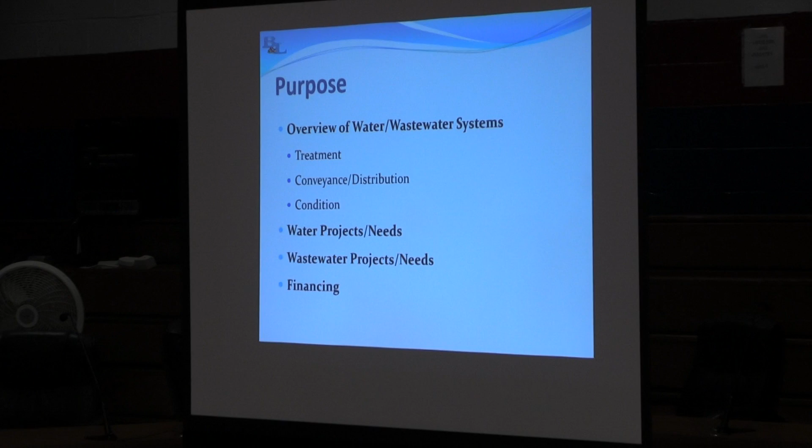So again, as Greg alluded to and John talked about, this is really just an information session on the town-wide state of the water and sewer system, some specific projects we're working on, and some of our thoughts on moving forward. I want to provide an overview of the water and wastewater systems within the town, what some of the needs are, some of those needs being addressed right now with design and construction projects, and then a quick discussion on financing towards the end—how much these projects are costing and how they'll be paid for in the future.

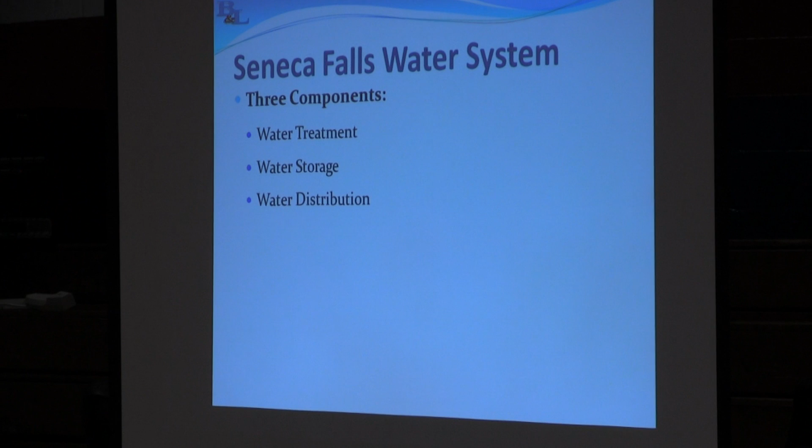So the first thing we're going to focus on is water within Seneca Falls. There are 3 components to the water system. We've got 3 boards over here, so even while I'm talking, if you have a specific question, feel free to go up and take a look. The one on the right is an overview of the water distribution system, the primary components for the water treatment and supply system within the town of Seneca Falls. The 2 drawings on the left provide an overview of one of the projects I'm going to talk about, and also a nice snapshot of the overall sanitary sewer system within the town. So when we talk about water, there are 3 components: treatment, storage, and the distribution system. We'll get to those.

So just a real quick background: water for the town of Seneca Falls is treated at the Seneca Falls treatment plant. Ironically enough, it's in Fayette.

Near Cayuga Lake, about 5 miles. I'm not sure if everybody is familiar with where the treatment plant is. It's about 5 miles south of here, right off Parker Road, on the west shore of Cayuga Lake. There's an intake pipe that the water is drawn from. Within that intake pipe, a couple things happen. There's a chemical injection process to deal with zebra mussels, basically an oxidant to keep the zebra mussels out of the intake.

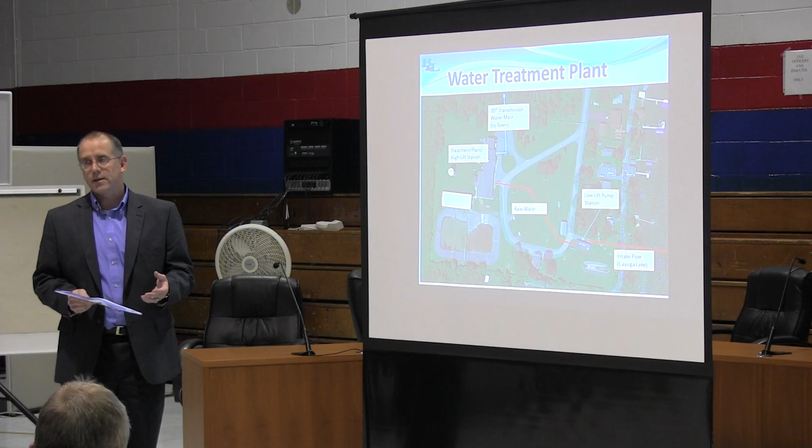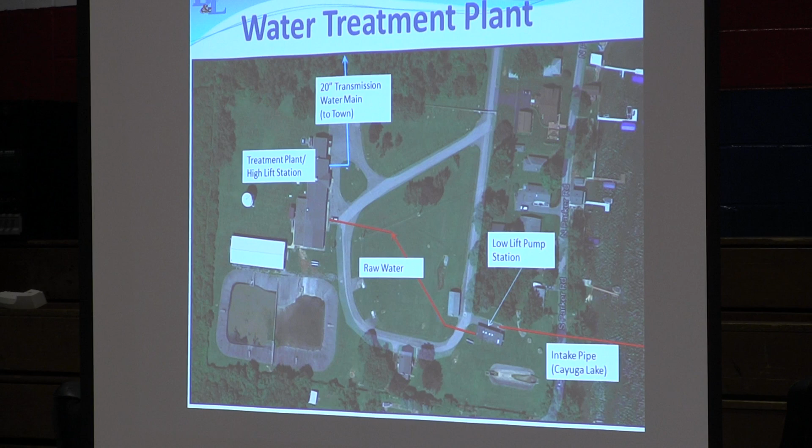Water is pulled into what we'd call a low lift pump station. It's a series of pumps, essentially an intake station. That low lift pump station sucks the water out of the intake and pumps it into the treatment plant. Within the treatment plant, there's a series of processes. Primarily, you're looking to remove solids and disinfect the water prior to distribution. Water's tested, and we'll talk a little bit about that.

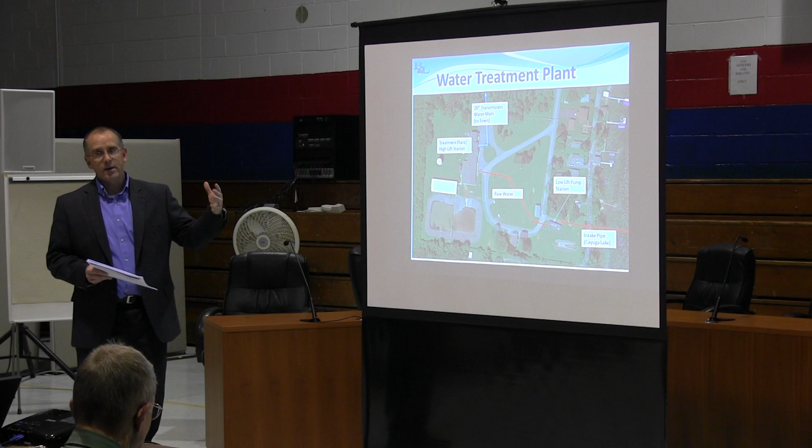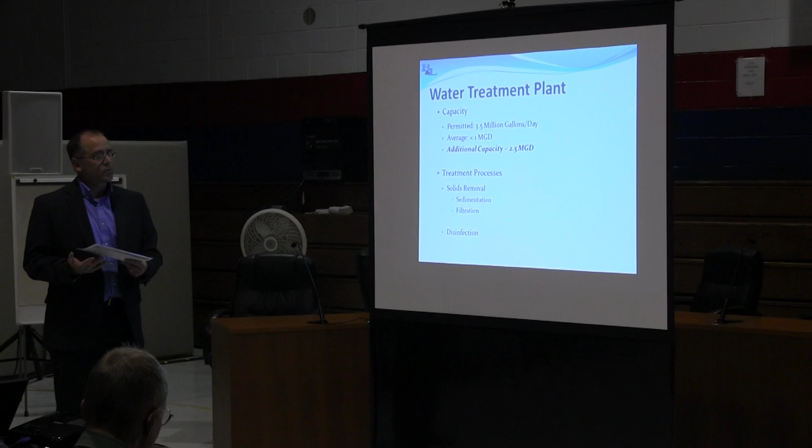From the treatment plant, there's a high lift pump station, a series of pumps that essentially pump that water about 5 miles north into the town into the storage tanks. The current treatment plant within Seneca Falls was originally designed and permitted for about 3.5 million gallons per day. It's only doing about 1 million gallons per day, so there's excess capacity. There's a lot of treatment components, filtration units, pumps that are right now sitting idle because the plant's only putting out about 1 million gallons per day. Simple math is about 2.5 million gallons per day of additional capacity within the treatment plant.

As I mentioned before, if you have any questions specific on what the treatment processes are, fire away. I don't want to get too detailed.

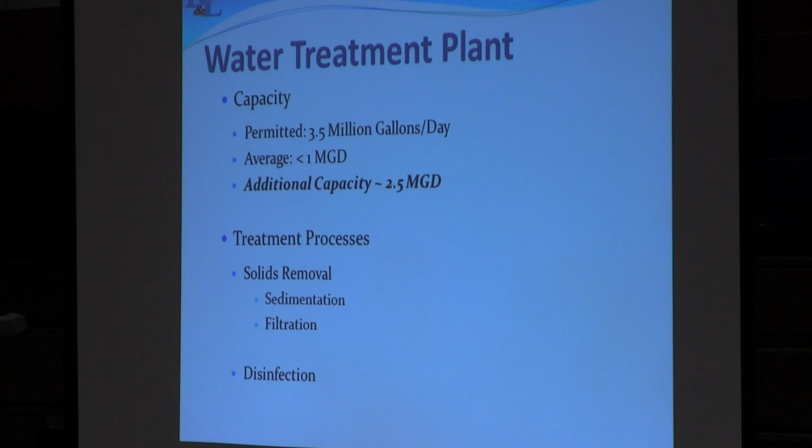I'm going to get the microphone set up. I can talk louder if that helps. It's on, okay. There you go, thank you. So because it's being taped, you're going to have to stay right here. Is it better? Okay. If anybody has any questions on specific treatment processes, engineering type things, I tried to keep this pretty high level. I can talk to you afterwards. Do you have a question back there?

Yes, the disinfection, I want you to explain that, and if it doesn't involve blue algae possible treatment and so on, I want you to touch on where that would be dealt with. The disinfection, what really is that? Okay, well, I have a slide for that. Good question, excellent. Well-timed question.

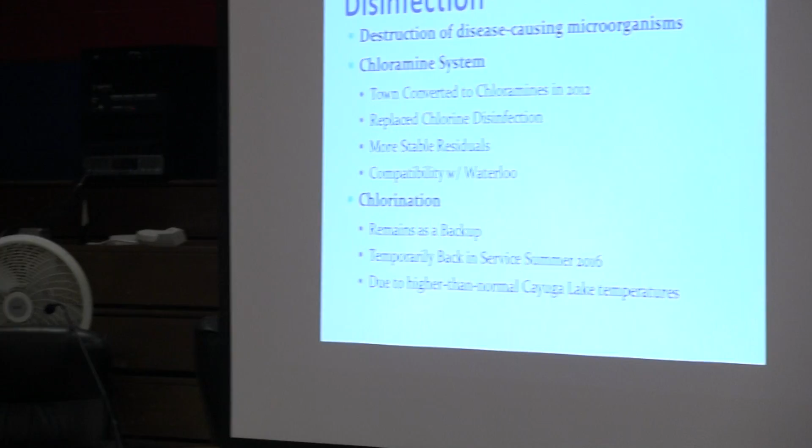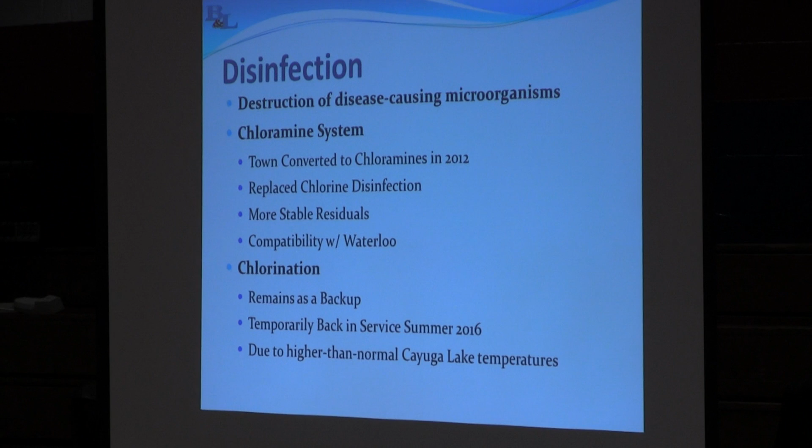Basically, the final part of water treatment is disinfection. You've got pathogens, bacteria that need to be destroyed. There's specific criteria within EPA, Department of Health to destroy those. Typically, it's done with an oxidant, the most common being a chlorination type system. The town of Seneca Falls has used two processes for many years: a chlorination process, which essentially is an injection using chlorine gas. In 2012, they converted to what's called a chloramine system. A chloramine is a type of chlorine product, it's chlorine mixed with ammonia. That's done at the treatment plant.

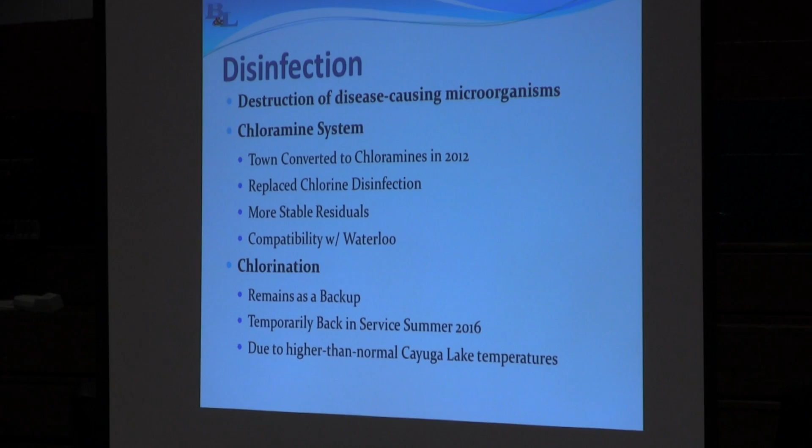The benefit of the chloramine system is it's got a longer life, a little more stable product than chlorine gas dissolved in water. Basically they're oxidants, they react with constituents in water, so they have a certain shelf life. Within the treatment system, you need to demonstrate that you've got a residual, a lower level of that chemical that stays within the treatment process through the distribution system, at the end of pipe at the users. So the current system is the chloramine system. The town has the capability and has actually had to switch back to chlorination temporarily over the summer. Additionally, one more step is a UV disinfection step in advance of the chlorination process. UV is basically ultraviolet light that provides an immediate death or kill of the bacteria. The chlorines provide a residual, so whatever bacteria or pathogens are in the system, the chlorines are there to address them.

After the treatment, every town that has a treatment plant is required to test the water. On an annual basis, the town does a full suite of these tests. Many of the tests are done more frequently, and a lot of these tests are done within the distribution system as well. This is the list of the tests that are performed.

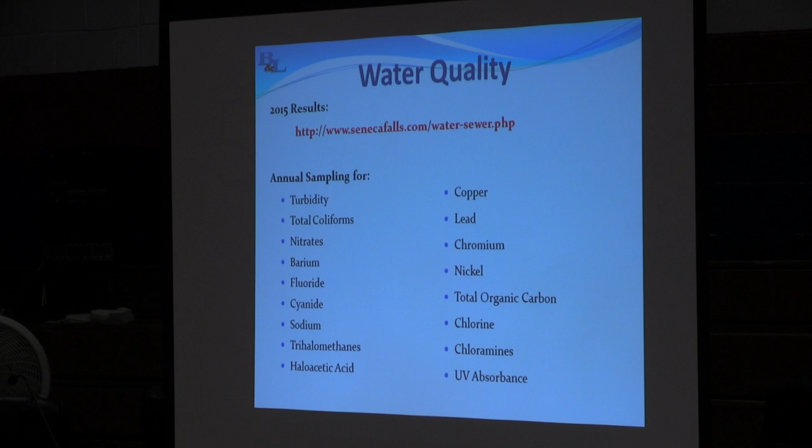Now up top, I have it highlighted. The water quality report is available for the public. It's posted on the town's website, senecafalls.com. If you click on the water sewer tab, it'll take you right to that report. The report provides the analytical data, the results of the water quality testing, and provides a summary of what the water treatment process is and the work that was done.

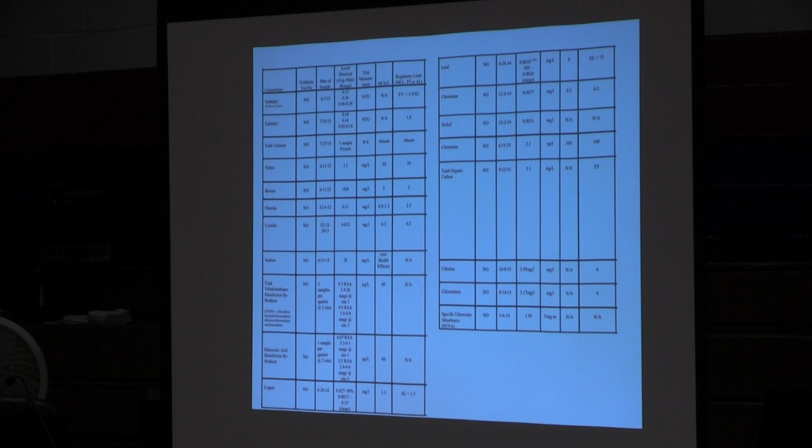The current report is for the year 2015, and towards the end of the year, they'll publish the data for 2016.

Question: Does Cayuga Lake show high levels of salt like Seneca Lake? Not as much, I guess Seneca Lake is the highest. Our intake is Cayuga Lake. From my understanding, Seneca Lake typically has a higher total dissolved solids, TDS as we call it, than Cayuga Lake. But is it high relatively speaking to freshwater bodies? It is a freshwater body. Seneca Lake typically has a higher natural salinity than Cayuga Lake, from the salt mines or salt veins. I believe so, yeah. That's my understanding, it's a natural deposit within Seneca Lake.

So the data that was there, this is basically what you'll see if you go on the report. It's certainly not intended for anyone to look at or scrutinize at this point, but this is the published data that's out there, just to give you an example of what you'll see if you go on the website.

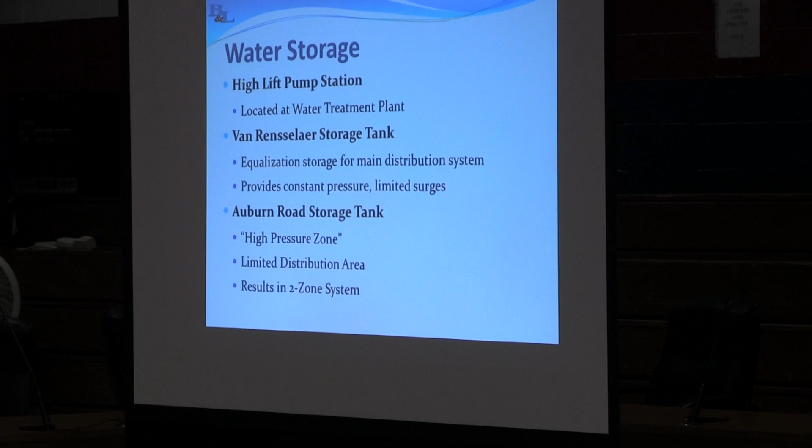So from the treatment system, we've treated and disinfected the water. In order to make the system run smoothly, the town has 2 water storage tanks. The way water works, as you all know, your taps are on in the morning and at night, so there's a demand curve, as we call it as engineers. The demand for water is not a straight same amount over 24 hours. In order to address this, we put equalization tanks in the process.

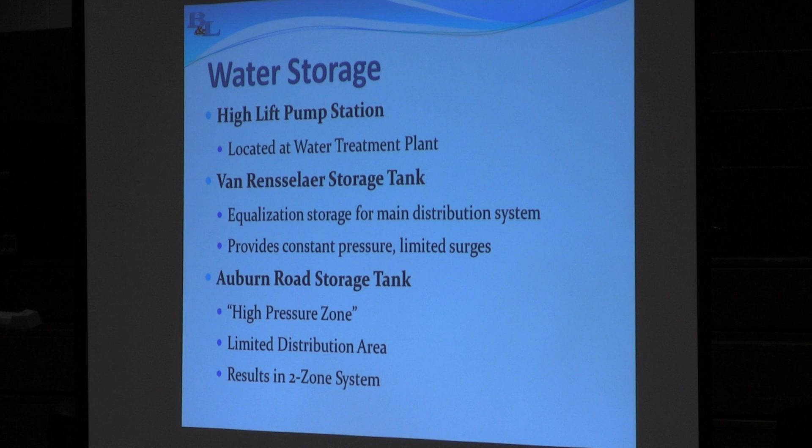So the town has 2 equalization tanks. One is the Van Rensselaer tank, the second is the Auburn Road tank. I'm going to talk about those a little bit more. Really the primary intent there is to provide a constant flow of water, so if you turn the tap on, then water's there. That's one of the projects the town's been undertaking this summer. We'll talk a little bit about those and what we saw with those projects.

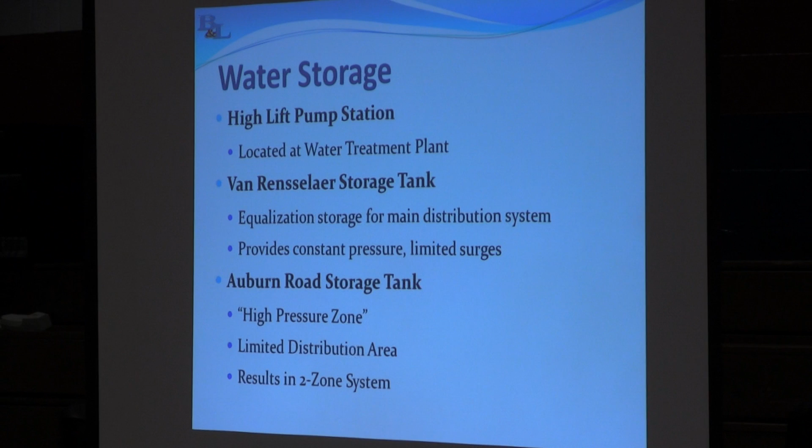That's the Van Rensselaer tank, I'm sure most people know it, on the south side, south of the canal. That tank was installed in 1962. About 20 years ago, the village did an interior-exterior recoating. The tanks are very large, they require maintenance, and it's pretty critical to keep them functioning that they are periodically inspected continuously, and periodically coated on the outside to prevent rust and on the inside to prevent corrosion as well. So currently that tank is undergoing a recoating process.

The contractor the town has contracted with, Utility Services Group, is doing the interior portion of the tank. That's a specialized coating, I believe it's a urethane-based coating. So the interior of the tank is cleaned, sandblasted, residuals removed, and they come in and basically paint the tank. The interior work is currently done, and we expect the exterior will be completed in 2017.

That tank holds about 1,500,000 gallons. It's about 100 feet from the base of the ground surface to the base of the tank, and the tank itself is about 20 feet high. Really what the intent there is, you're pumping water into that. That's essentially the high point in the town, and that's where the water flows downhill, providing the pressure to the distribution system for most of the town.

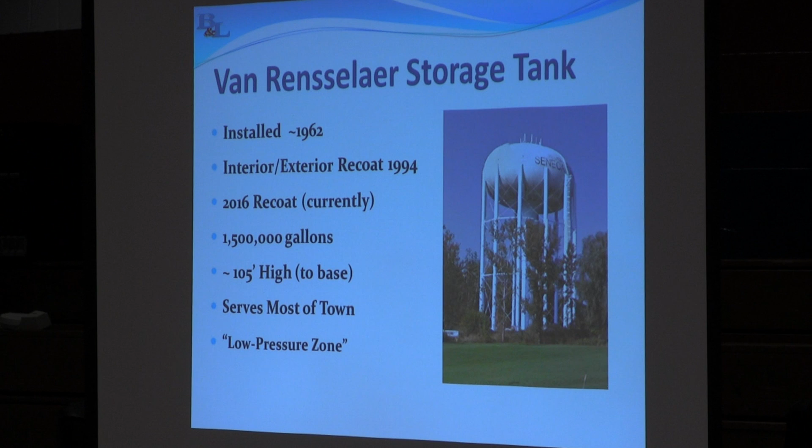The Auburn Road storage tank is located north off of Auburn Road, 5 and 20. That was installed in 1990. From the treatment plant up to the village and then into the northern part of the village, there's a slight increase in elevation, so the northern part of the town really requires a higher pressure zone, as it's been referred to. Prior to that, there was a booster pump station that supplied that, which was kind of a maintenance headache to keep running. So in 1990, the village erected the smaller Auburn Road storage tank. It's a smaller tank, it doesn't serve as large a population base as the Van Rensselaer tank does.

That tank did undergo the recoat. It has been painted on the outside and the interior. That was done late spring, early summer.

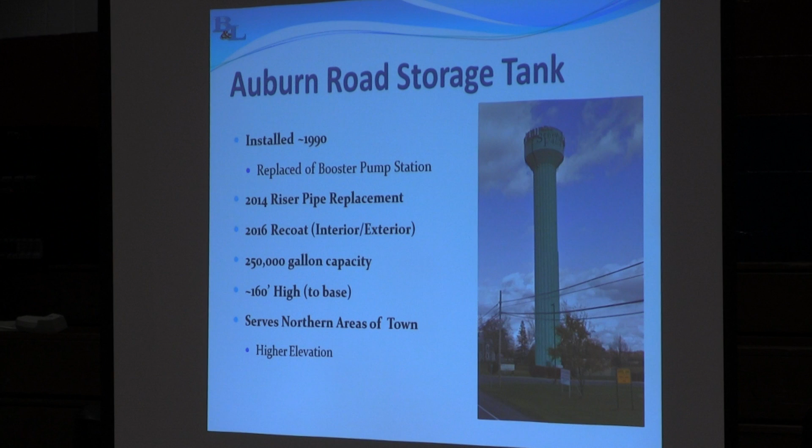Below the tank there's a booster pump station. Basically, the water is discharged to the booster pump station, and all that booster pump does is pump water to the top of the tank, which provides that additional pressure. While that tank was offline, the town was operating that booster pump continuously to keep the water out of the tank and allow it to be recoated.

That process required about a 30 to 45 day process. So the tank was offline for about 45 days, which required a lot of extra babysitting while the tank was operating. That tank is about 160 feet high.

As I mentioned, it's a higher elevation, requires a higher pressure, and that primarily serves the northern area of the town. There's kind of a line of demarcation - I think Oak Street, Cuba Street, and Blackbrook Road kind of bounds the areas of the town. There's actually a series of check valves that keep the two areas separate, because if that fed the whole town, it would essentially have a backwash effect, and those areas of town wouldn't have the pressure. All that pressure would be towards the south.

So in summary, just talking about water treatment and the distribution system - the water treatment plant is operating under capacity, it's in good condition, and it exceeds the requirements for water quality. I think that's the good news message we're here to discuss - from a water treatment standpoint, things are going well. With the storage tank, they were in need of maintenance for 20 years or so.

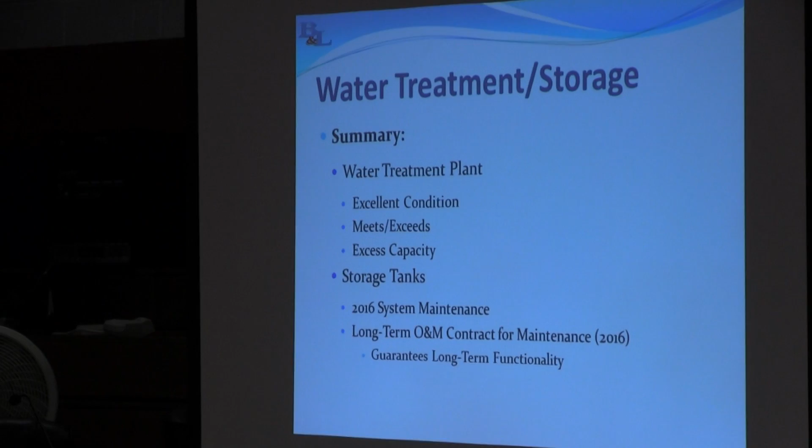The town elected this year to enter into that. Historically, that's been done on a contractual basis, a one-time contract. This year, the town elected to go to contract with Company Utility Services Group. They provide constant annual maintenance, and part of that process is they will go in and paint the tanks, with that cost annualized over time. So instead of paying typically what could be $1 million to $2 million as a line item to paint a tank, that cost has been spread over the 20-year contract period - I believe it's a 20-year contract. So really what that does is take the responsibility to maintain those tanks and puts it on the contractor.

So within the district, once we're in the tanks, you've got a pretty extensive, pretty old distribution system. The current series of water mains throughout the town, the former village - it extends roughly about 80 to 85% of the current town properties served by water. So most of the town has public water available.

We did some rough math, we're estimating about 100 miles of water distribution piping within the town. Remember, this goes from 5 miles south of the village, northwards up to 318 near the Montezuma Winery, Vince's Park essentially. And I think the key thing here is there's a wide range - this is the former village, it's aged infrastructure, so there's water pipes that have probably been in play since the early 1900s.

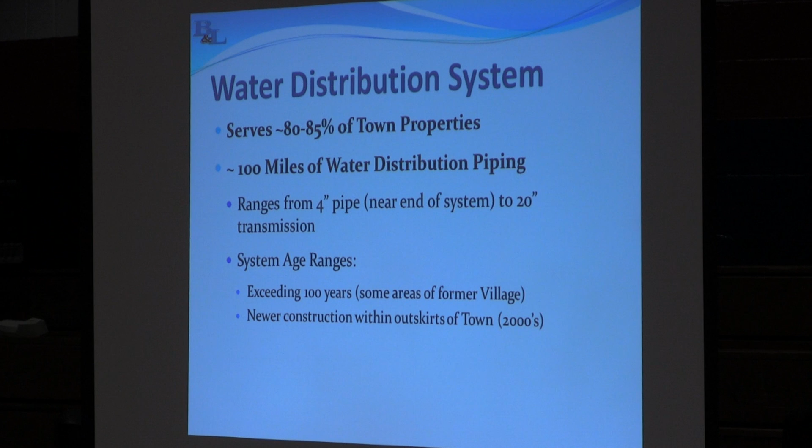So we talked about the age of the distribution system, primarily in the former village. There's pipes in there that have been in the ground for probably greater than 100 years, with lower resilience. They're going to be more prone - they're metal pipes, iron pipes, and they are going to wear down over time. So they're going to be more prone to breaks. They're iron pipes, so they will corrode.

The corrosion process typically is a scale, or we call it tuberculation - not a great word, but that's the term we use in the water industry to talk about corrosion within pipes. Basically, it's a metallic scale that forms on the inside of the pipe. The primary issue with that is it just restricts that cross-sectional area of the pipe, the amount of water that can actually flow through.

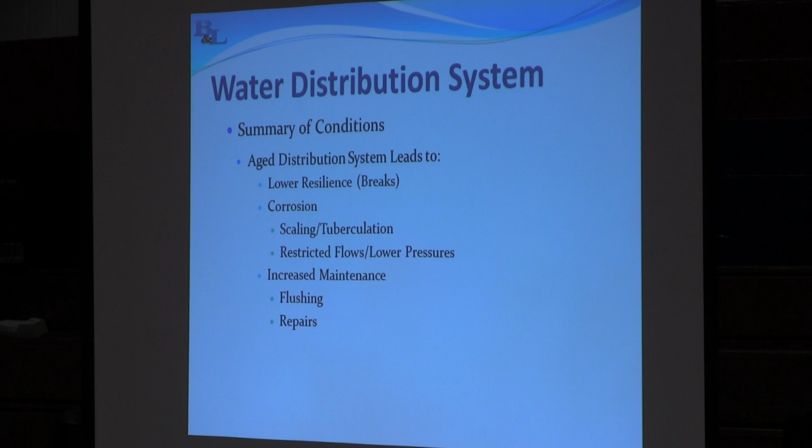So what that leads to in the short term is increased flushing - the smaller pipes will tend to require more maintenance and additional repairs. As we've talked about and noticed through the town, primarily Miller and Rumsey Street, there's been a lot of additional water breaks this year. The second piece that's exasperated it a little bit is with the tanks offline, it's required more manual operation of the system. So those pressure surges that the tanks typically handle haven't been available. There's been a lot of, with these type of systems, pumps turning on and off leading to surges, which, with the aged infrastructure, is going to lead to more breaks.

So you mentioned 2016, the water main breaks. I think late in the summer, the crew was out doing a lot of repairs. I think they had 10 near the period between August and Labor Day, primarily on Rumsey and Miller Street.

What we found in this process is that some of these older areas, specifically Rumsey Street, there was a 4-inch water main that was providing a lot of service. That's a pretty small pipe. Typically, if you're designing a water system, you're looking at a 6 to 8-inch pipe minimum, and typically that pipe's plastic, it flows fairly smoothly. So certainly the 4-inch line was, given the age and size of the pipe, something that was concerning.

So we projected that running down Miller Street, there's likely going to be some additional work as we go down. That's been the initial issue that we've identified. We certainly recognize that there's more areas of low pressure, low flow.

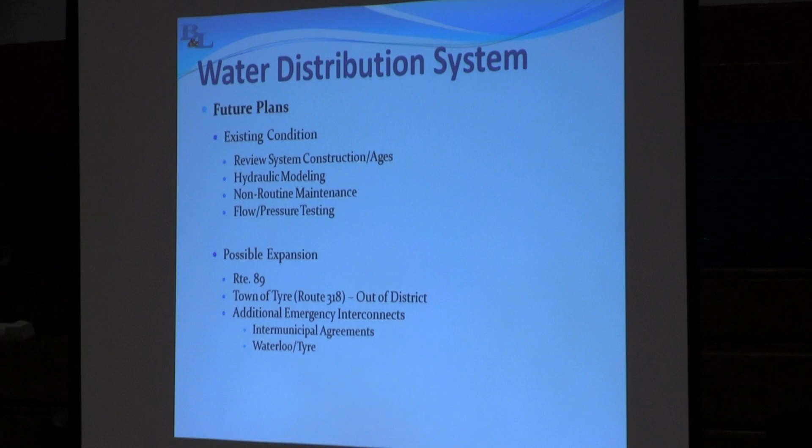So with that, what are the future plans? We've identified the fact that there's aged infrastructure. There's been projects that have been put on the table over the years. Nothing's really ever come to completion, but essentially within the older village, in areas kind of furthest out where you have low flow, those are going to be more problematic. We identify the fact that there's going to be some required maintenance.

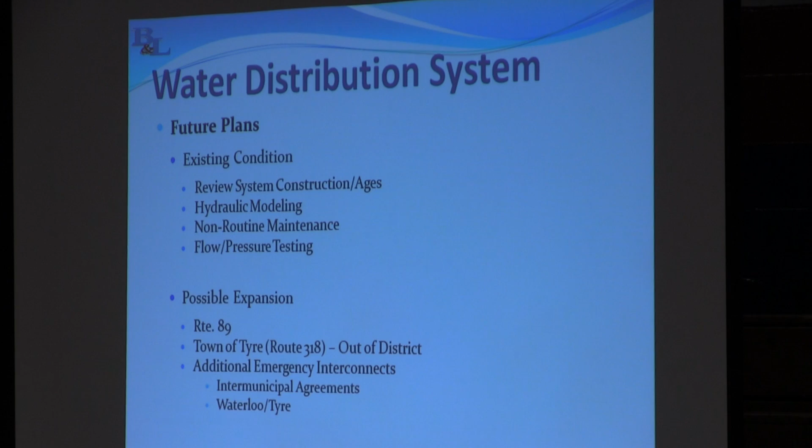As engineers, typically what we would do is develop a hydraulic model of the system. We'd look at what pipes we can predict, what the pipe flow and pipe pressures are going to be. We calibrate that with testing throughout the system to see if the tests we perform are meeting the predicted pressures and flows. Those are the keys we use to identify where the issues potentially are, whether the system is behaving the way it's supposed to, or if it's behaving indicative of some restrictions within the pipe.

So that's coupled with identifying non-routine maintenance, where are the hot spots, meaning where the town has had to focus a lot of energy repairing breaks and valves throughout the network.

I think the other piece that's come up is looking at expansion. As we mentioned before, most of the town is served, but there are areas within the town that aren't served. So one of the early ones we're looking at is along Route 89. There's been some users out there that have expressed interest in obtaining water service. That's some of the good news, coupled with the fact that we have a treatment plant with the capacity to provide the water out there. So we're looking at possible expansion out there.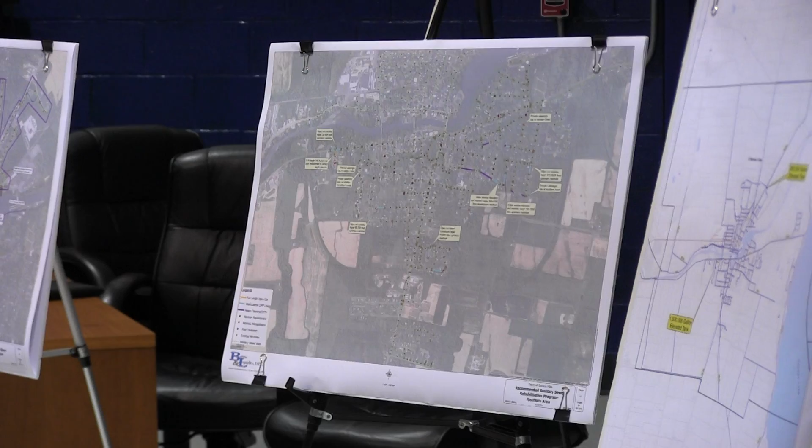And then beyond that, within the town of Tyre, the Montezuma Winery is a facility that's expressed interest in water. That's a project that's going to be pursued next year between Tyre and Seneca Falls.

And then the other thing we've looked at, discussed in greater length, is additional emergency interconnects. There's currently, I believe, 2 along Route 5 and 20 between the town, the Village, and the Waterloo system. I believe the interconnect was operated in 2014. There's some additional ones as we go north to provide, in the event of an emergency, if the tank is down for some reason, or if there's a water main break, those emergency connections just provide a more robust system, the ability to provide constant service. So those are some of the things that we're exploring.

So that's it for water.

Question? Yeah, if you could refresh our memory, the 2 towers, ballpark figure, what was the cost? To install, or the original cost of the tower? No, what was done year to date on the Auburn Road, what's still to be completed over at Van Rensselaer? There was some sort of dollar figure, capital appropriation.

The total cost of that project is probably, both projects, somewhere in the neighborhood of about $3 million. Now, with the Utility Services Group, the contract that the town is currently under, they spread that cost out over several years. No, I understand. Okay, so it's $3 million.

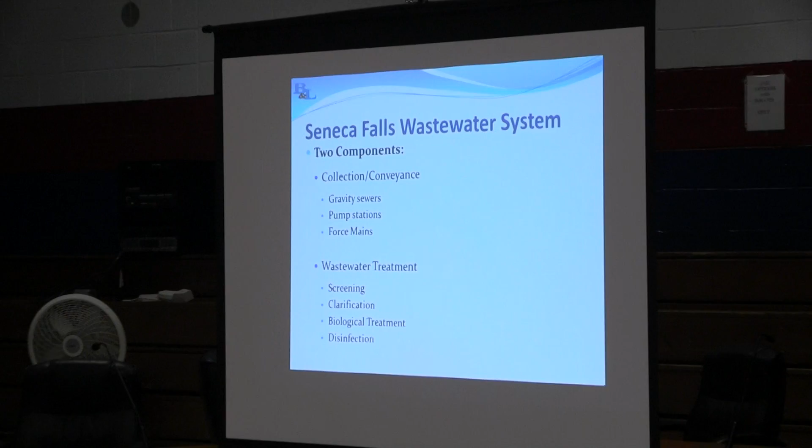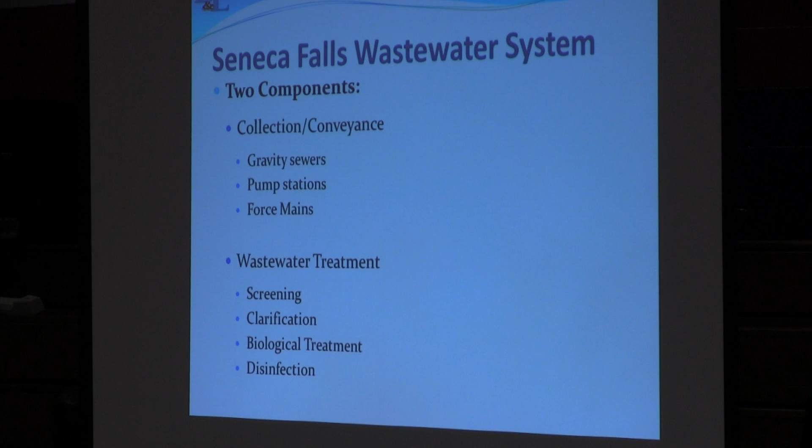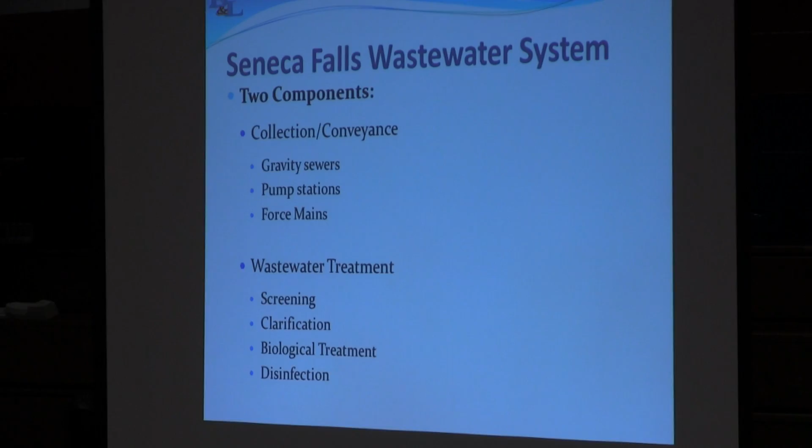Now we're going to talk about wastewater, which is not as nice, but it's necessary. Like water, wastewater has two components, but it's the opposite. With water, you treat it and then distribute it. With wastewater, you generate it, flush it down the toilet into the collection system, and ultimately into the treatment plant. So the collection and conveyance system consists of gravity sewers, pump stations, and force mains.

I'll get into the details, but with wastewater, the coverage within the town isn't as extensive as it is with water. People generally tend to want water before they care about sewers. In rural areas, leach fields are fairly common, though they don't work great in Seneca County in many areas. For the lion's share of the former village and most of the town, sanitary sewer is available. The cost to provide sanitary sewer versus water is pretty prohibitive, substantially more expensive than providing fresh water or a water main.

The wastewater is treated at the town treatment plant, located just on the downstream side, south side, I'm not sure which lock number. It's basically a conventional wastewater treatment system: initial screening, clarification which is essentially settling the solids, and biological treatment, which is performed in 99% of municipal treatment plants. Essentially this is aeration, mixing the wastewater with oxygen. There's bacteria in the wastewater that consumes the organics within it. Following that, there's a settling process called secondary clarification, and a disinfection step as well.

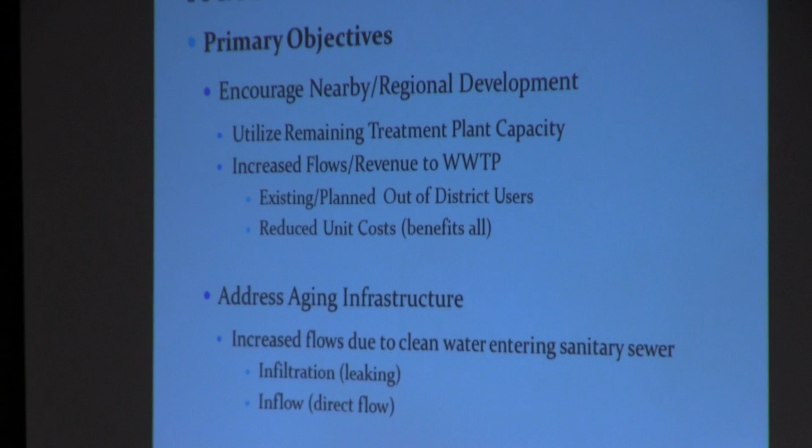So we're actively working on several wastewater projects right now. We looked at what we're working on and tried to lump them into what we're trying to meet, what our objectives are. There are two objectives, and I'll explain why some of these work for Seneca Falls. The initial one is really just to enhance or maintain development. Commercial facilities are more apt to want to develop if they know they have sanitary sewer, since a larger facility can't rely on a leach field in many areas. So to get larger commercial retail within the area, having infrastructure that includes sanitary sewer is pretty vital.

As I mentioned before with the water treatment plant, it's currently sized at about 3.5 million gallons a day and doing slightly less than 1 million gallons a day. Ironically, those are about the same numbers for the wastewater treatment plant: it's permitted for 3.5 million gallons a day, and does about 1.6 million gallons a day on average. We'll get to the reason for that, because additional water goes into the wastewater treatment plant beyond just the water out of your tap.

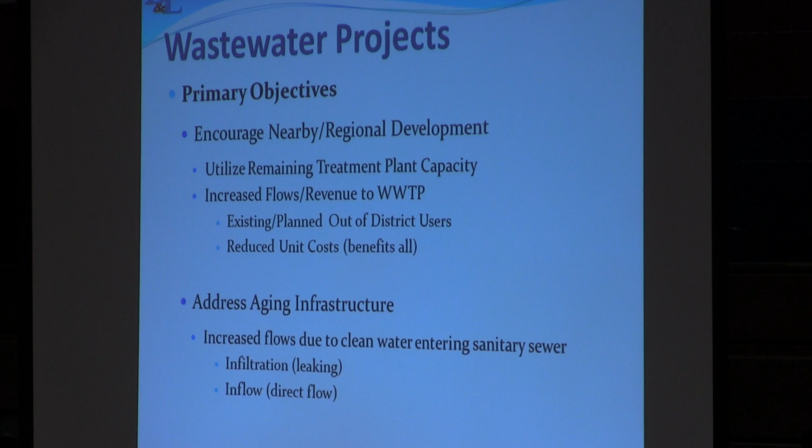With enhancement of development, you've got an aging infrastructure. The sewers within the former village, similar to the water system, probably went in slightly after water, but there's a lot of older sewer pipes using brick and mortar construction that isn't practiced anymore. So there are issues with the sewer system leaking. When it leaks, we think of it as infiltration and inflow—storm water and groundwater getting into the system, which is additional water that needs to be treated at the treatment plant. So to back up, the wastewater treatment plant is permitted for about 3.5 million gallons a day.

Currently averages about 1.6 million gallons a day going into it. There's about 1.9 on average million gallons per day remaining capacity. So the treatment plant is definitely operating below efficiency, similar to the water treatment plant.

What we see though, in some studies we did a few years ago that have actually been going on for several years, is that due to infiltration issues with stormwater and groundwater during rain events, we'll see some peak flows going into the plant that exceed 6 to 10 million gallons per day on an hourly basis.

So shortly after a significant rain event, that plant will see a really high inflow. For wastewater, it shouldn't happen. Wastewater is, remember, coming out of your house - your taps, showers, washing machines. That's really where wastewater comes from.

What we found in Seneca Falls, as a result of the aged infrastructure and the way things used to be built, is there are a lot of unknowns with how things were built. There's a lot of interconnections between sanitary and storm sewers within the system. The aged piping and old manholes lead to leaking as well.

Within the treatment plant there's what we call an equalization tank, an EQ tank. We believe it's about 3 million gallons. That tank's been there for a while and it's not in great shape. So when we get these surges, a lot of times that initial slug of water, that tank will store it, and they'll use it to help bleed the water back into the system. It hasn't been used extensively in the last few years, but during a high rain event, it will be used.

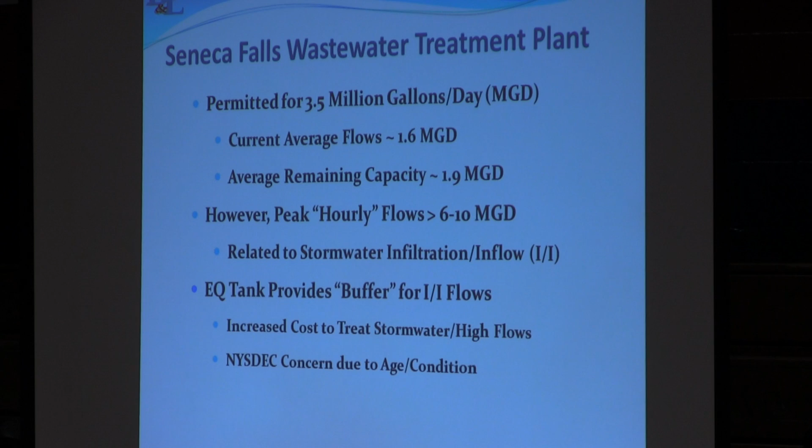The DEC, who basically regulates and oversees the treatment plant, has expressed concerns with the condition of that tank. Some of the work we're doing is really in response to that, just to address what needs to be done with that tank down the road.

That's an overview of the treatment plant. I'm going to drop the mic quick.

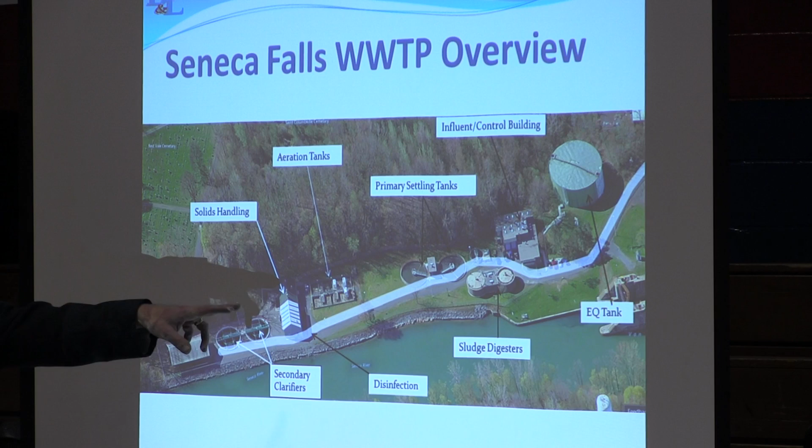From the EQ tank, water goes to the influent control building, which is the initial screening - rags and whatever comes through the sewer system, those solids are removed there. Then it's primary settling, the initial shot for dropping out a lot of the grit and solids. Then the aeration tanks, where wastewater is mixed with oxygen to biologically degrade the organics. Then they go through secondary clarification or settling, and then disinfection. So those are the processes.

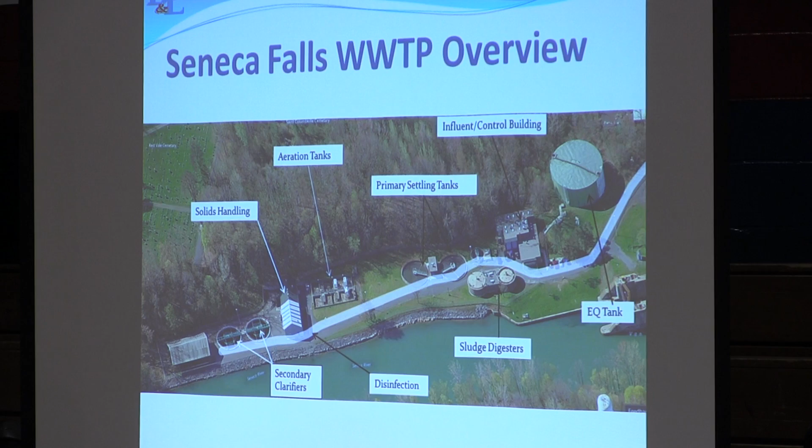This is located, I think, on the south side of the canal, right past the original Elizabeth Cady Stanton School, down on the canal.

So the projects we've been working on tie into the same goals we talked about before, as the development-related projects. There's some we're working on that are solely related to ongoing development and possibly bringing in more wastewater flow into the treatment plant. And then there's infrastructure-related projects as well, identified specifically to address some of the aging infrastructure.

I'll talk quickly about the development-related projects. The first one, which we talked about when I was here in March and actually have shovels in the ground on now, is the Route 414 sanitary sewer upgrade. Following that, there's the Kingdom Road pump station. Those are the two we've identified as more related to future development needs, additional conveyance, bringing it to the treatment plant.

The infrastructure-related projects - I've also identified Kingdom Road there. That project is twofold. Part of it is to provide increased capacity for additional flows coming from areas north, Tyre, Junius, with some projects happening there. The second part is that the current Kingdom Road pump station is undersized, as well as the force main that discharges to it. It's an old force main, probably some 1960s-era infrastructure.

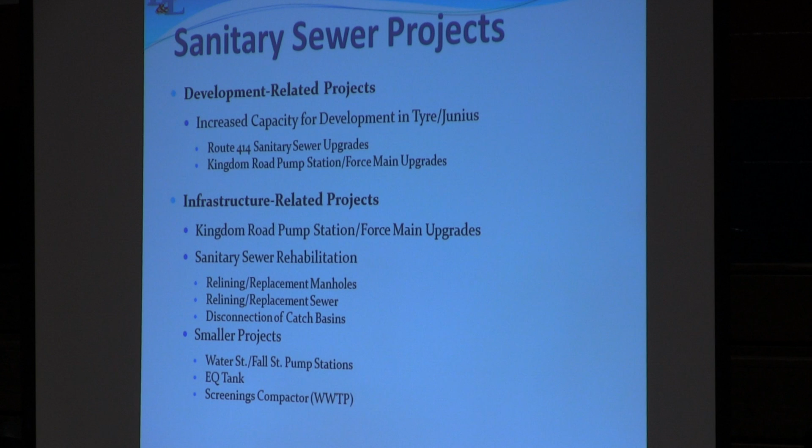The key thing with the infrastructure we've talked about is the rehabilitation of sanitary sewer infiltration and inflow issues throughout the existing collection system. That primarily includes about 3 major components. There's about 170 manholes - in 2013 we did inspection of every manhole within the town and identified about 170 that are in poor repair of some type. Some require replacement, some just require replacement of the frame. So the extent of repair for individual manholes varies. For the lion's share of them, they're constructed of brick and mortar, and the mortar is degraded - they leak. If you open up a manhole, you won't just see wastewater at the bottom, you'll see water leaking into the manhole. That's clean groundwater flowing in that ends up going to the treatment plant and being treated unnecessarily.

So with the manholes, the primary mode of repair is going to be relining them, typically using a cured-in-place lining system. It's a project we're in the design phase on right now, and there's some additional investigation steps we'll be going through.

The big part of the sanitary sewer rehab is there's a lot of catch basins, storm sewer catch basins, and curbside gutters that we've identified as either connected directly into the sanitary sewer, or given the age of the pipe, there's a leak. We've camera'd many sewers and seen storm sewer leaking into the pipes. So part of this project is identifying where the catch basins are and looking at rerouting them - disconnecting them, whether direct or indirect connections from the sanitary sewer, and routing that storm sewer into the storm sewer collection system.

A little question here - the Kingdom Road Pump Station, Force Main - so is that sanitary, and it's pumping because it's at a lower elevation?

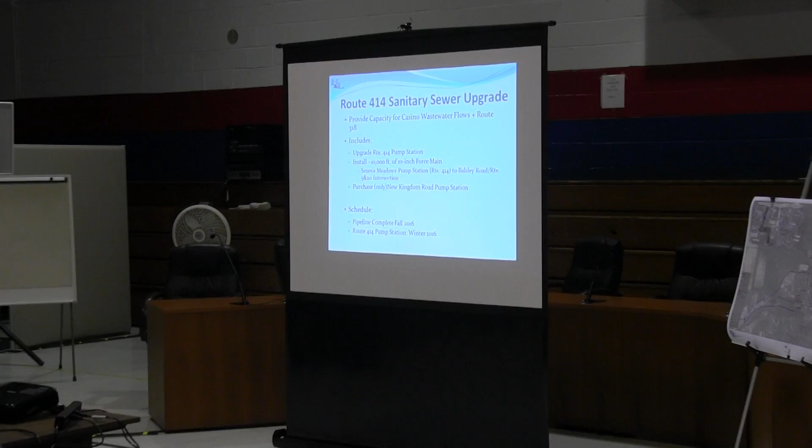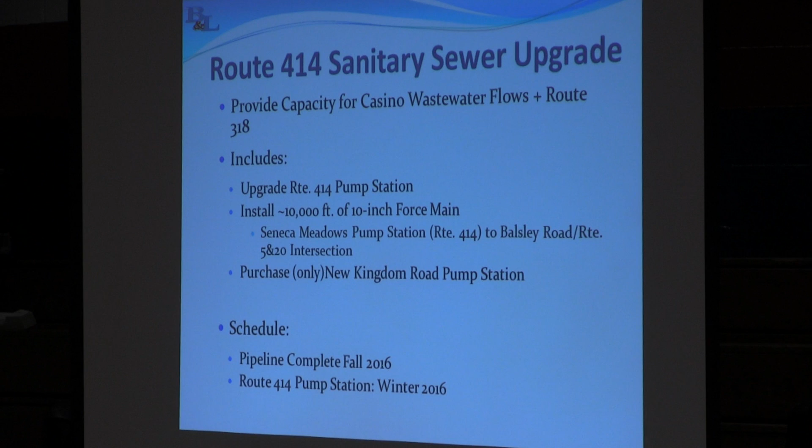Along 414 there's existing infrastructure from Petro down to the new Seneca Meadows area - it's the Route 414 pump station, near the new Blackbrook channel, a couple miles down 414. That project will replace that pump station, upgrading it with a larger one. There's also additional force main going down, starting about the Seneca Meadows facility, that will bypass the existing pump station and run down 414. Del Lago is funding that work. The 414 pump station is being replaced and upsized, and on the next slide - Kingdom Road - that project is actually funding the purchase of a new pump station there as well.

Right now we're on track to finish the pipeline this fall. The new 414 pump station will be installed this winter. Where is it going to go from there to get to us? Good question.

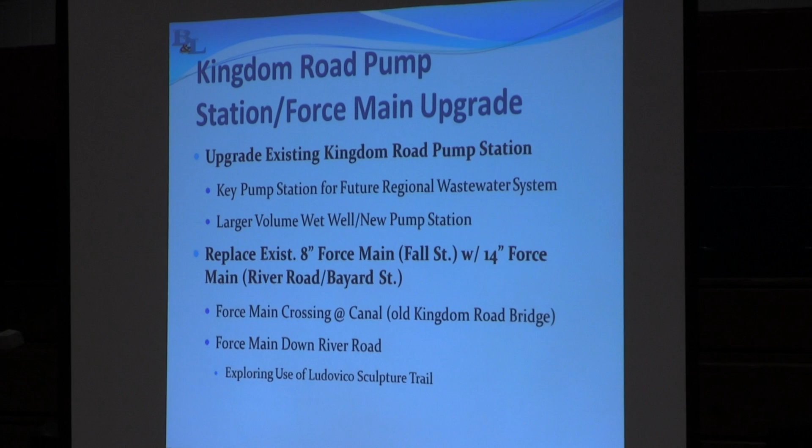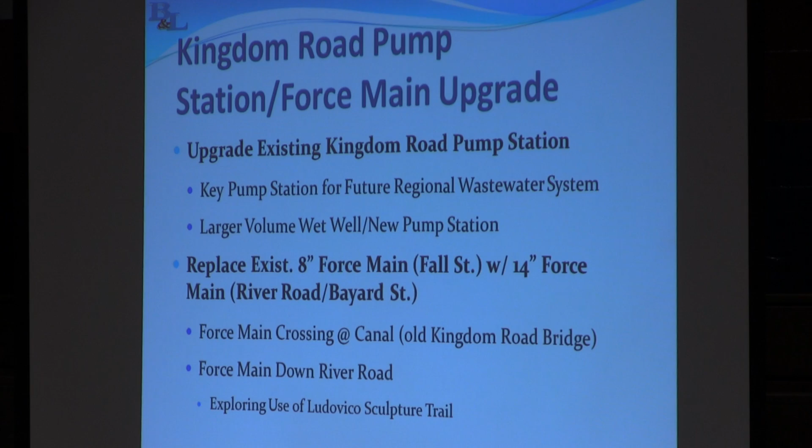I think last time I had a map showing it, I don't have it here, but to trace the source: from Del Lago, they've installed a force main below the thruway. I think they tie into the existing Petro lift station. It flows via a gravity sewer that goes down 414 to a pump station - what we call the 414 pump station, it used to be called the Petro pump station - and that's being upsized.

There's an 8-inch line that's going to remain in place, so that water will go to the 8-inch line. From that point, once you get to Seneca Meadows, we're putting in a new 10-inch line. That line will chase 414 down about Balsley Road, going across the railroad tracks, across 414, then running down the north side of Balsley Road. There's an existing sanitary sewer gravity manhole there, and it'll discharge into that. That goes across 5 and 20, which essentially feeds the Kingdom Road pump station. So then what happens, it goes down Fall Street, 5 and 20?

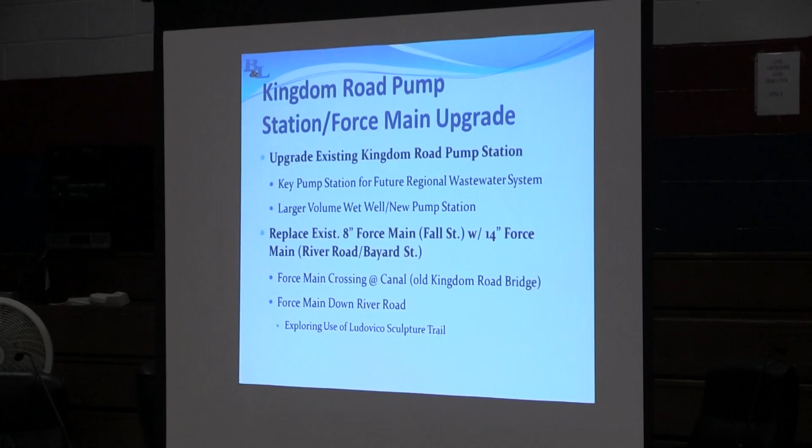We're not... Oh, okay, that's what these questions are well timed for. Okay, sorry, no I know. So really the question is, we talked real quick about the Kingdom Road force main. Actually, can you jump in? I'll just talk with pictures, do a much better job. I'm gonna drop the mic again. That's okay, you talk, I'll be your man.

Okay, where does it cross the canal? We're not following you. So what happens right now is the Kingdom Road pump station is located on the north side of the canal, right over here. It discharges into an existing 8-inch force main, installed circa late 1960s. That force main discharges down Fall Street. There's a large gravity manhole on Fall Street, I think at the corner of Fall Street and Rumsey, and then that flows down Fall Street. The crossing of the canal currently is underneath the Open Street Bridge, right there. That's how the wastewater makes its way across. That's the only crossing in the system right now.

That's essentially the connection between the north side of the wastewater system and the south side where the wastewater treatment plant is. Under the current project, the Kingdom Road station is going to be upgraded at its footprint, but we're going to install a second crossing across the canal using horizontal directional drilling. It's a very common process where a pipe is drilled essentially horizontally below the bed of the canal. That will come across and essentially be the start of the force main.

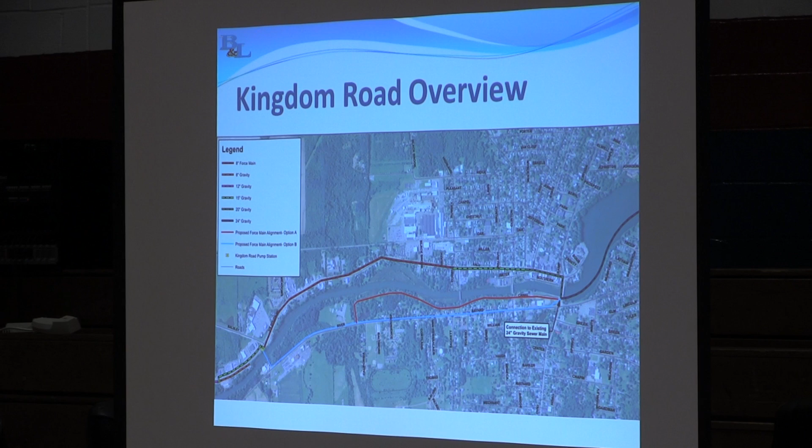So the new force main is going to run down River Road. Currently we've got two concepts in play right now. One is continuing that run down Bayard Street, but there's a lot of infrastructure there - storm, water, existing sanitary. The town currently is pursuing the option of turning that force main and going down the Ludovico Sculpture Trail instead. We've had several discussions with the owners of the property. The concept right now is kind of a shared project where the town would put in the force main using a lot of non-intrusive methods, horizontal directional drilling. In return, the town would provide a lot of the maintenance for that trail, and literally rebuild it into a much nicer upgraded trail.

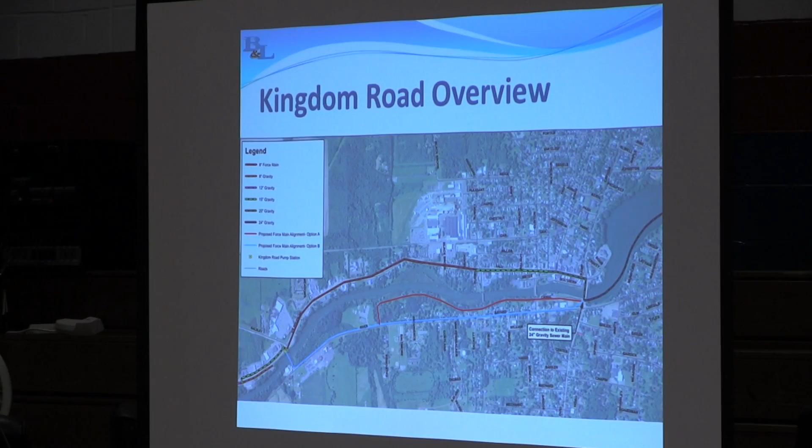Thank you, it'll end up being a better trail than what it is now. It would be, but if you were to go down there you'd have to do a full review. We go through a full SEQR review for that particular project. There's wetlands there, there's many issues. Yeah, that's what I'm thinking. That's why I think they're very opposed to ripping any of that up.

Well, the concept we've proposed would use horizontal directional drilling. What'll happen is you have a machine that drills a pipe below ground. They can extend it and track it on the surface so they understand where the pipe is at any given point. Typically 400 to 600 feet is pretty typical for that type of drilling. Periodically the pipe needs to come up and they need to dig a pit, but the impact to that trail is pretty minimal compared to going down Bayard Street, which would really rip up a pretty busy corridor. Next to Fall Street, that's the next busiest portion of town, so that's what it would take to provide that new infrastructure.

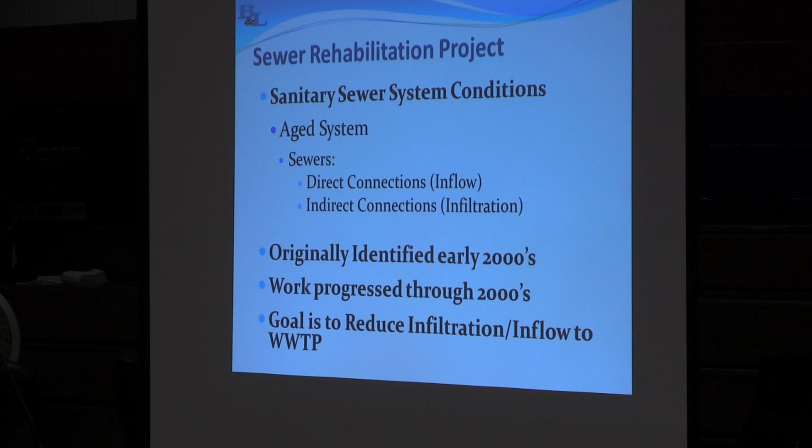Let's move on. So the next one is the sewer rehab. We'll talk a little more in detail about that. This is really the primary rehab, addressing the aged infrastructure - the leaking manholes, the pipes, the older pipes. So really the intent here is to seal up those areas of inflow and infiltration.

When we talk about inflow, that's stormwater that flows directly into the sanitary sewer. Infiltration is generally going to be groundwater. In some cases it could be stormwater that flows into a catch basin that's not flowing efficiently, so there may be some backups with that.

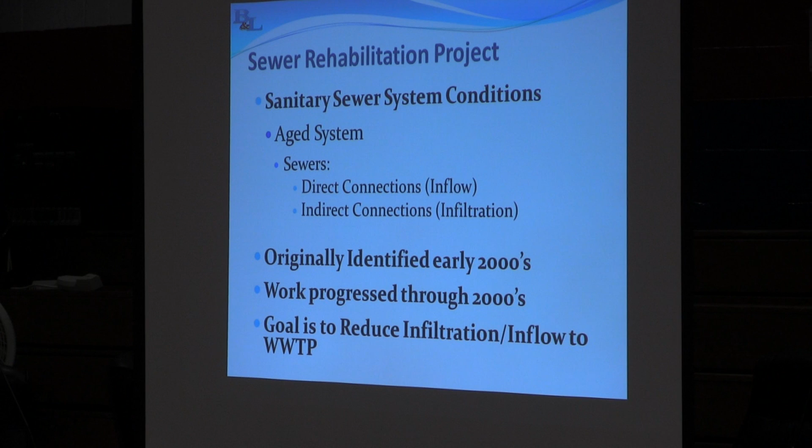In the process, in 2003 and 2004, our engineers went out and did an extensive survey of all the manholes within the town - I think I mentioned this before - cameraed several thousand feet of sanitary sewer within the system, cameraed storm sewer, and did smoke testing of sanitary sewer, just to identify where the issues were.

Really the intent there was to identify where the leaks are, and we're in the current process of designing and identifying the way to rehab those leaks. This day and age, in lieu of ripping a sewer out in a busy area, we can use in situ processes where we line the pipe in place. The technology for rehabilitation of sanitary sewers, manholes, and pipes has come a long way in the last 20 years. So if the pipe is intact and structurally sound but the joints are leaking, we go in and slip-line it, or use a cured-in-place lining.

It might be lining the interior of the manhole, or it might just be superficial completion where the cover has holes on it, so we'll be replacing the cover, providing a tighter seal on the surface completion to minimize stormwater getting in there.

The big thing we mentioned is straight up elimination. There's catch basins tied to the sanitary system, so the big nut as far as addressing stormwater getting into the system is really going to be the various catch basins. Through the years, the former village and the town have identified these, and as they've come up, they've been addressed. But it's a big system, a big undertaking, and hopefully we can get the last of those issues addressed.

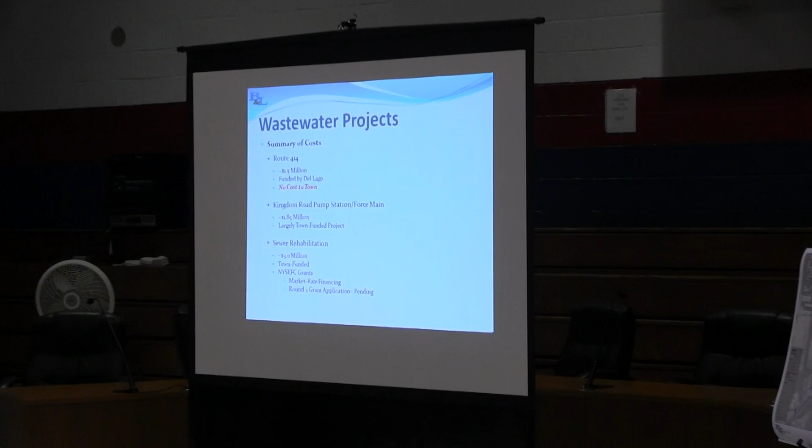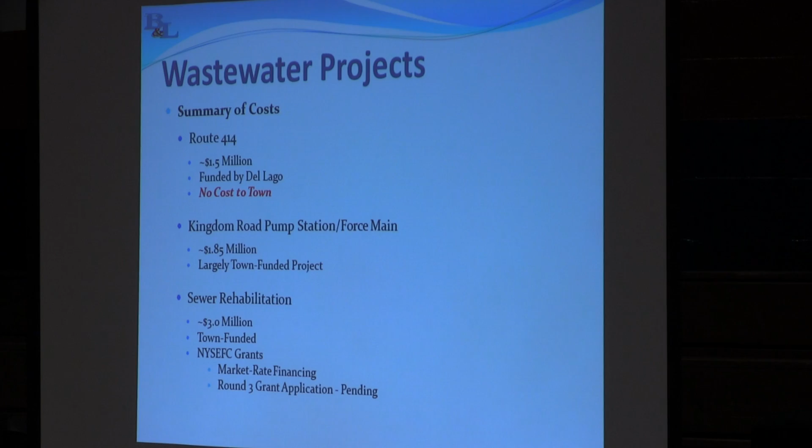The Route 414 project in general is about a $1.5 million cost. As I mentioned before, Del Lago is funding that. That piece of additional pipe really comes in because the casino has funded it in order to ensure they have a means to transport their wastewater. So they've funded that project - there really is no cost to the town for that.

If I may - the cost is being subsidized by the taxpayers because they've got tax breaks that far exceed this $1.5 million, so it's our own money coming back to us. Well, from the bottom line of the town budget, the town's not paying - there's a pipe being put in the ground and the check's being written by Del Lago. That's an accurate statement, big picture. It's coming out of their tax break. Well, I don't know about that. They're writing the check, so from that perspective - paid with our money.

Next is the Kingdom Road pump station. That project, whatever the final orientation of the pipe is going to be, is estimated at about $1.85 million total. That's going to be a town-funded project, and the need there is to replace an existing 8-inch force main that's aged and needs replacement. It's also going to enhance additional capacity, providing the mechanism to get additional wastewater flow into the currently underutilized wastewater treatment plant. I'll talk a little more about the economics in the next couple slides.

The sewer rehabilitation project has been estimated at about $3 million. That again is town funded. New York State has an Environmental Facilities Corporation, which is essentially New York's environmental bank. We're currently working with them on identifying either market rate financing for the project, or looking at getting a grant for it. We have a grant application that we're looking at for basically March 2017.

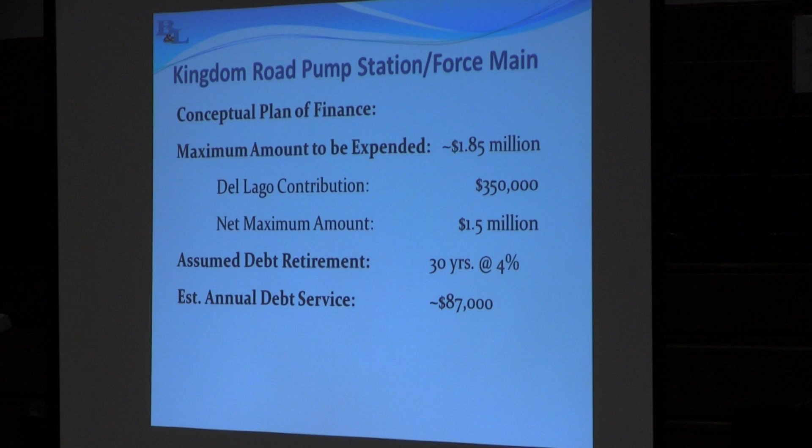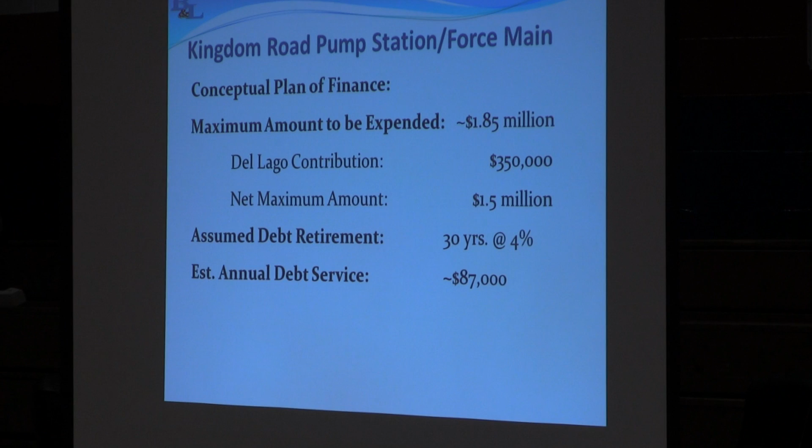So the cost for Kingdom Road is about $1.85 million. I mentioned the financing part - the existing pump station is undersized, so that will have a similar pump station to what's going in on 414. That piece is part of the casino project - they've also added that into the project, so that's about a $350,000 pump station that will be installed once the infrastructure is in place. So the net amount for that project is about $1.5 million.

So we basically looked at it as a typical municipal type project. Market rate of 4% is a rule of thumb number we've seen as an interest rate, bonded over 30 years, which works out to about an $87,000 a year debt service for the Kingdom Road project.

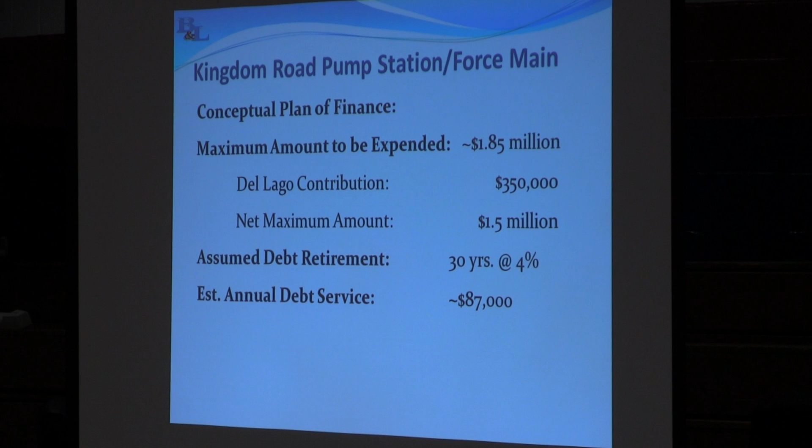The sewer rehabilitation, we did a similar exercise. We looked at the project, currently estimated about $3 million total. As I mentioned before, we're pursuing a Round 3 grant. It's a Clean Water State Revolving Fund grant, reimbursable at 25%. Initially, that project wasn't eligible for grant.

New York State EFC expanded the eligibility, so it allowed this project to be considered. We're looking for a March 2017 consideration for that grant. So if we do get that grant, then that project will be about $2.25 million.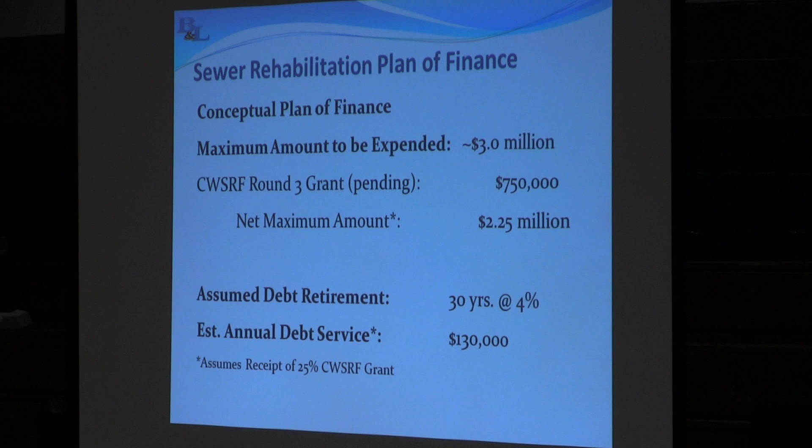Using the same 30-year payback, 4% on a municipal bond, it's about a $130,000 annual debt service for that project.

I think the key thing here is providing a summary of what the costs are. Looking at the specific projects, ultimately, costs to the town budget: there will be no cost for the Route 414 project. The net estimated annual cost for Kingdom Road is about $87,000 a year. The estimated annual cost for the sewer rehab is about $130,000 a year.

I think the big thing to recognize here is there's an annual cost to that, but what those projects bring to the table, with 414 and Kingdom Road, I've talked about Del Lago. I guess the other project we haven't discussed is 318 development.

Route 318, town of Junius, along with Seneca County and the Genesee Finger Lakes Regional Development Council, has identified that corridor as a pretty key development area for the town of Junius. It's the Waterloo Outlet Mall.

Waterloo Outlet Mall currently brings about... I believe 20... what's Waterloo Outlet Mall bring revenue-wise? I can't remember the number. But for Seneca County's total revenue, the tax revenue coming off of Waterloo Outlet Mall is pretty substantial. I believe it's near about a third of the overall tax revenue coming into the county. Keeping that outlet mall operational is pretty critical to Seneca County as a whole.

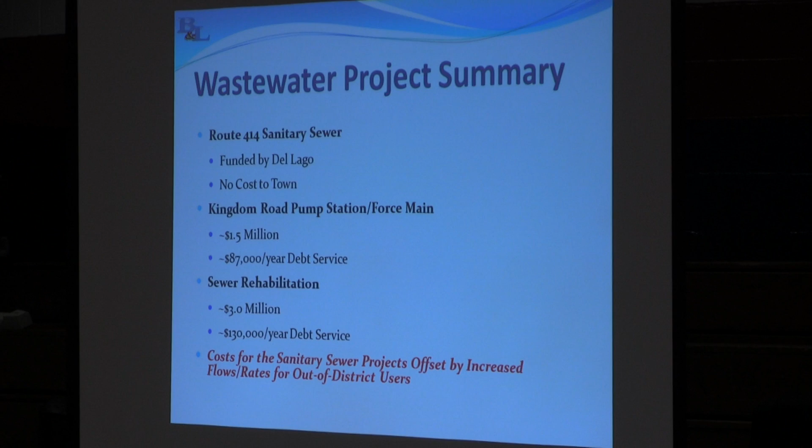What that provides is the plant will operate more efficiently. There's additional revenue coming in because whatever wastewater comes to the plant, they have to pay an out-of-district user fee. And the more water that comes into the plant, the more efficiently the plant can run. The long-term objective is that the operational cost for the existing Seneca Falls treatment plant would see a net reduction in the overall cost to treat wastewater.

So the unit cost—the hope is these flows come in and increase volume. There's a fixed cost to operate a treatment plant, and there's also a cost to treat each gallon, but the net contribution of that fixed cost goes down the more flow that comes into the plant.

Are they running sewer lines down 318? I know it's not part of Seneca Falls. Currently? Yeah, it's a gas line. Oh, it's a gas line? The 318 project is really under design right now, probably starting summer 2017. But yeah, the work going on right now, I think, is a natural gas line. Oh, it's a gas line.

Well, but sewer income coming in from Del Lago and all those people anyway, it goes into the wastewater, into the sewer budget—you'll probably offset that. Yeah, that's the point of it. You're exactly right, David, thank you. There's additional flow coming in. The point is that money will offset that debt service.

Yes. All of it? If I may, maybe this is more a discussion with our town officials. There's discussion within the community that spending is out of control, and this isn't to blame the current administration, because a number of these projects started prior to a number of you taking office.